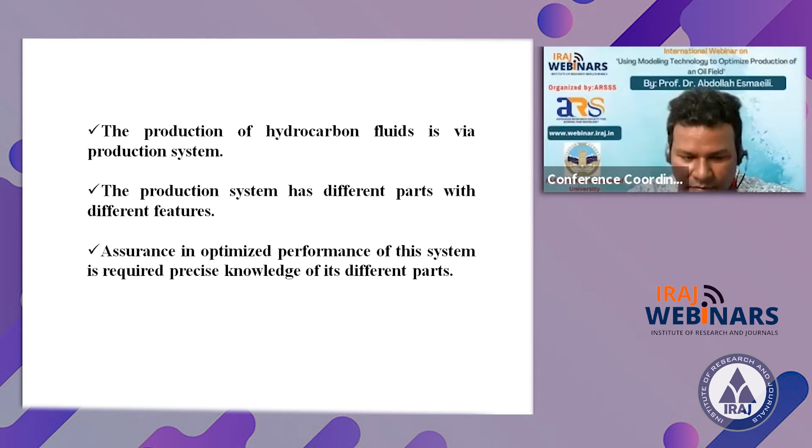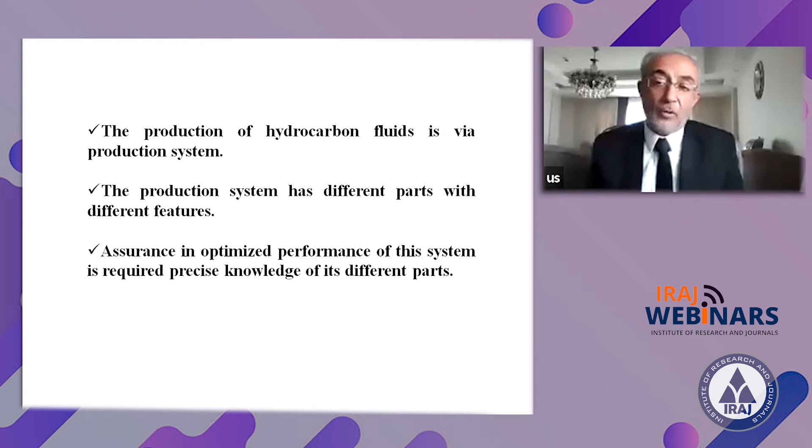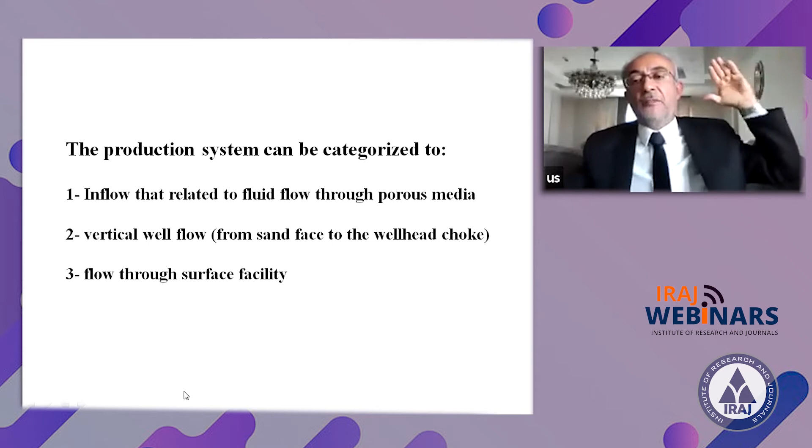So the production system can be categorized according to our division in the petroleum industry. Inflow relates to fluid flow through the porous media to the media. So we can divide this into three parts: the fluid will start from the reservoir to the wellbore, then from the wellbore to the wellhead, then from the wellhead to the production unit or to the refinery, or to any other units. So we will have three parts.

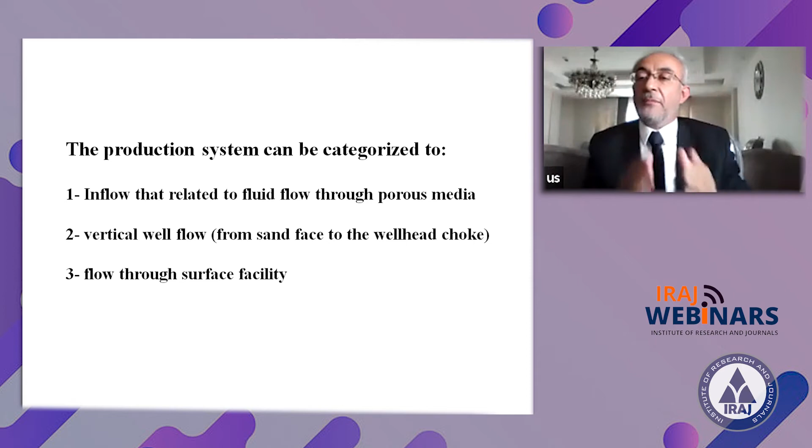First of all, in our system, from the reservoir to the wellbore, then from the wellbore to the wellhead, then from the wellhead to the production. So if we want to optimize this system, we must be able to optimize the total of this system, from reservoir to the wellbore, from wellbore to the wellhead, from wellhead to the production unit.

So by using available methods - but how can we? Here at the first line you can see: by using available models, any part of the production system can be modeled. Yes, but how? We are here to discuss that. Inflow information of production systems such as reservoir pressure, temperature, fluid type, and porous media characteristics, and vertical well flow information like well geometry and pressure control devices, can be used to model the production system.

And after modeling, what will happen? After modeling, we must be able to interpret it. So not only is the modeling very important, but interpretation is more important than modeling. So after modeling a production system, any problem can be specified, then proper methods will be able to remove them to solve our problems by modeling.

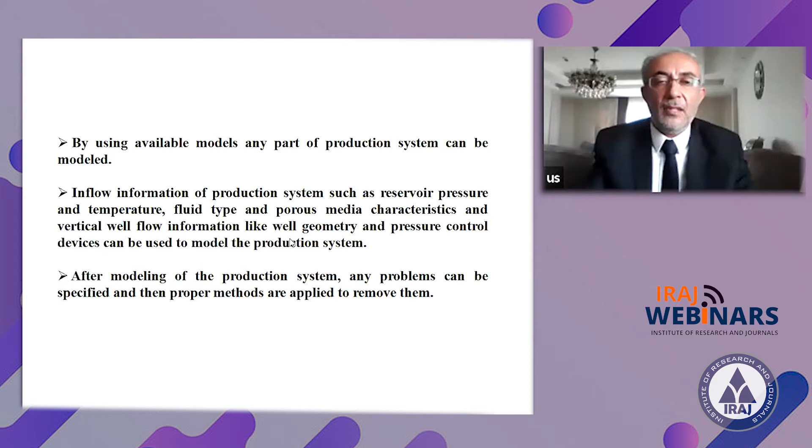Okay, so what will happen in this study? In this research, we will select two wells of an oil reservoir. As you know, in an oil reservoir we have a lot of oil and gas wells - maybe 100 wells, maybe 200, maybe 300, sometimes more than 300. In simulations, it's not possible for us to simulate or model all of these wells. So we will select two of these wells and compare them together and with the actual case.

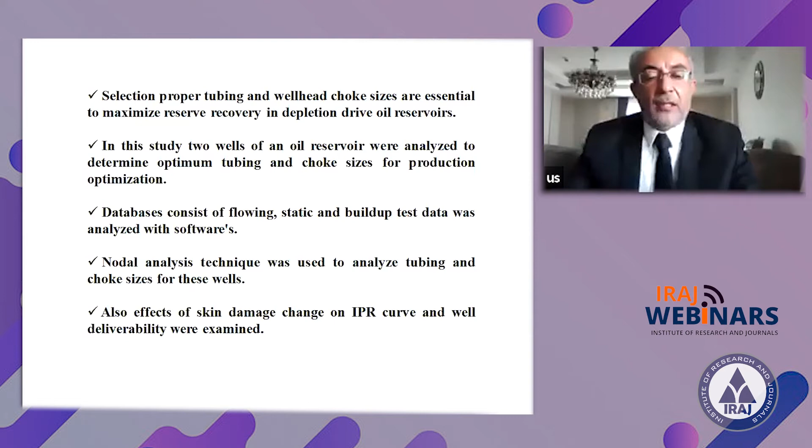So, nodal analysis techniques - what techniques will we use? We will use nodal analysis techniques to analyze tubing and choke size for these wells.

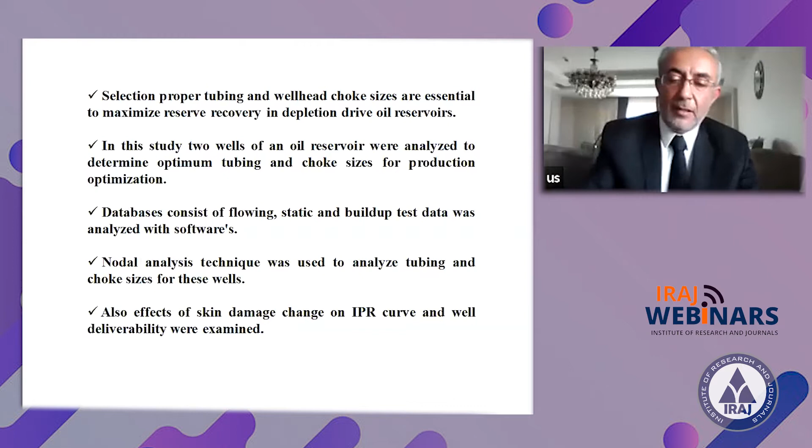What will be the objective of well optimization methods? Our objective in optimization, first of all, is to find the optimum rate. Then we must be able to optimize our other facilities.

According to this, you can see well inflow performance relationship (IPR) and tubing performance relationship (TPR) are the basic requirements for analysis. We will use the totality of this data in our modeling.

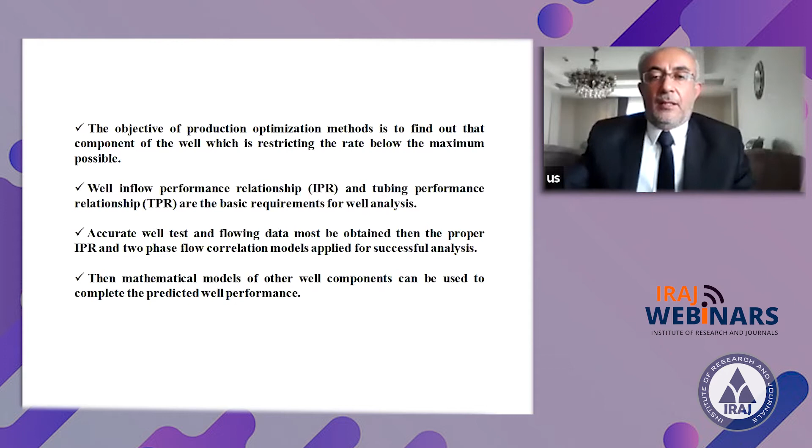Analyzing well performance - how can it be done? Analyzing well performance is an important step to optimize production by improving production techniques.

How can this analysis be done? This analysis can be performed by well test and examination of the field data.

Data gathering was the main problem of this study - not only for this study, but for all our studies. Data gathering is very important at first because, as you know, our studies will be based on our data. If our data has errors, the modeling will have errors. So we must be careful with the data at the first step.

This analysis can of course be done by software. But which software? As you know, we have several software packages for modeling.

We have several software packages in the oil and gas industry - some for underground modeling and some for surface facilities, to model the devices of our production unit at the surface. So generally, our modeling software is divided into two groups: one to model activities underground, and one to model activities at the surface, at the ground.

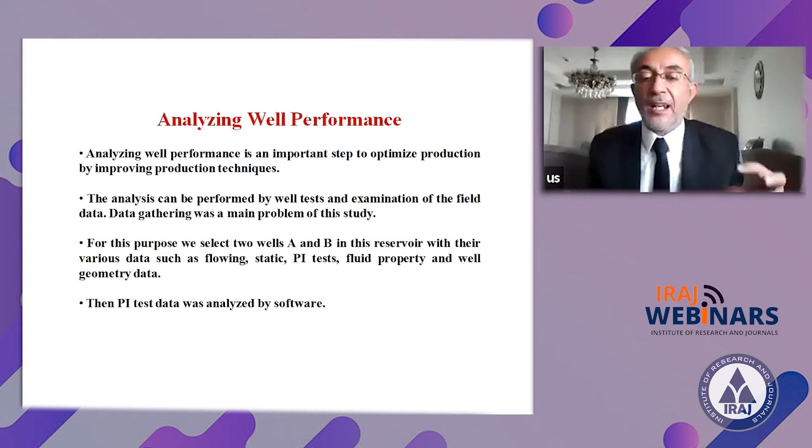PI test, as you know, stands for productivity index test for the well. It will be used in a short time, therefore it cannot detect the correct skin and permeability precisely - it only shows an approximate amount of skin and permeability, as you know.

After that, using software, the tubing size and choke size for these wells were examined. Also the effect on inflow performance in production, skin factor, and reservoir pressure will be analyzed. We will have tables, table 1 and table 2, showing the well reservoir fluid properties, and production data collected for well A and well B.

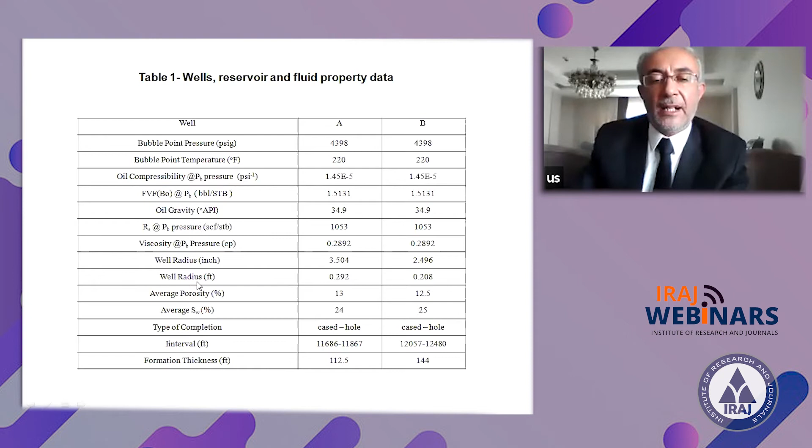Table 1 shows data for well A and well B: bubble point pressure, bubble point temperature, oil gravity, and oil formation thickness, for example. Table 2 shows production conditions of well A and B, for example production rate, reservoir pressure, GOR, water cut, and other properties.

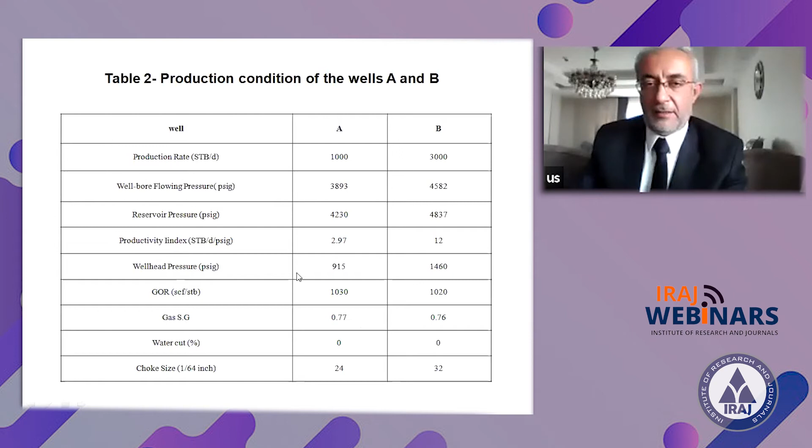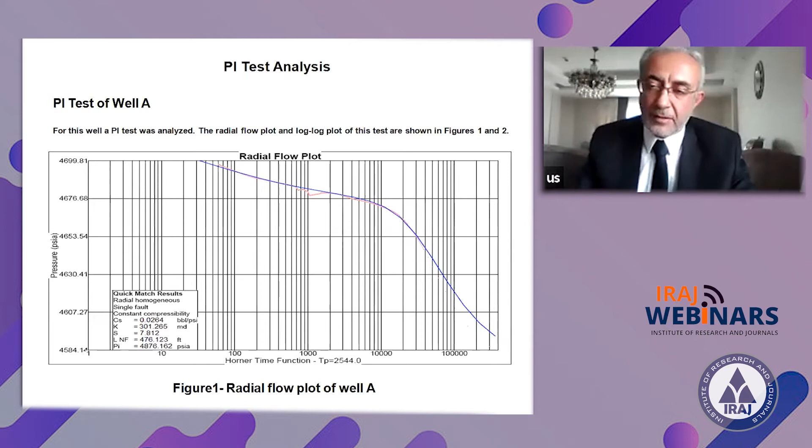In the PIT data, you can see what happens in PIT analysis. This PIT analysis is for well A. It can be done using PanSystem software, or by Eclipse 200. So we have several software options for this analysis.

This is the log-log plot. This is the radial flow plot, and here is the log plot. Again, this is for well B, and this is the log plot for well B.

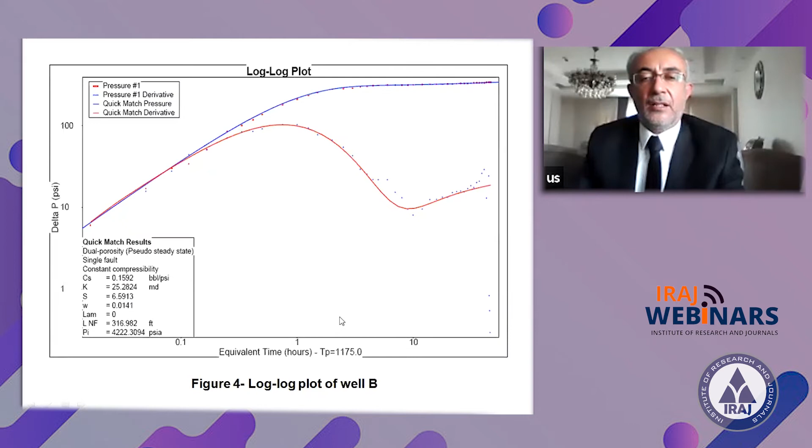The results of the PIT test and analysis by software, including skin factor and reservoir permeability, are summarized here - for well A and well B, the skin factor and permeability.

How can we get this data? By analysis, by well test, and by PIT. As you know, in the petroleum industry we can get permeability and skin factor from logs, and at the same time we can get this data from the laboratory and from well testing. So we have two separate methods: well logging, or well testing.

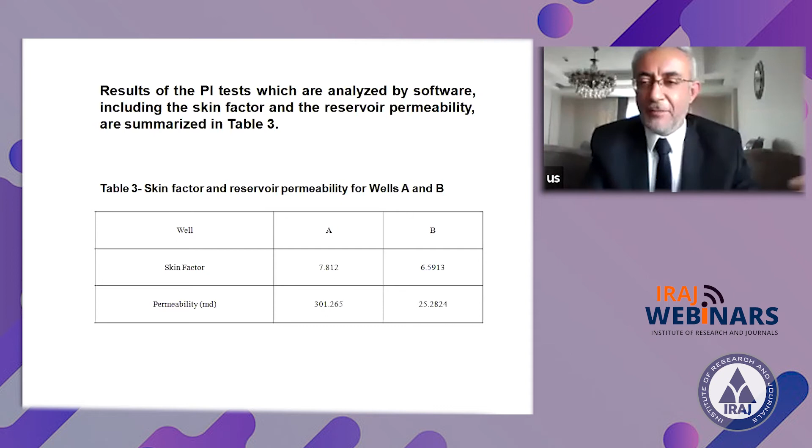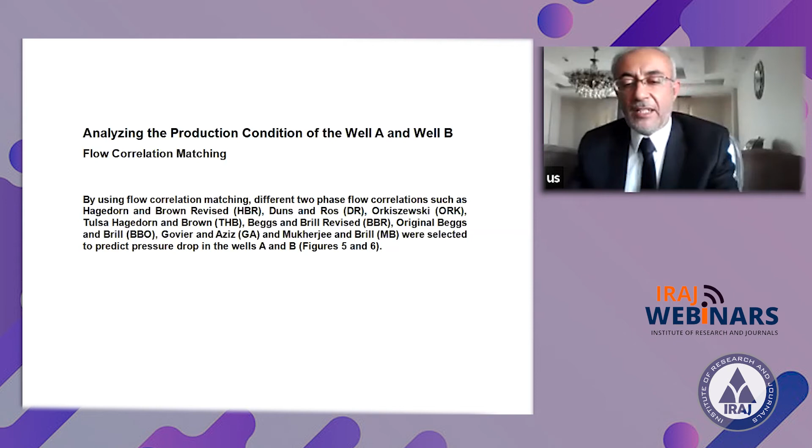Analyzing the production condition of well A and B fluid - now we will have flow correlation matching. Here is correlation matching for well A, and here is flow correlation matching for well B. How? By software.

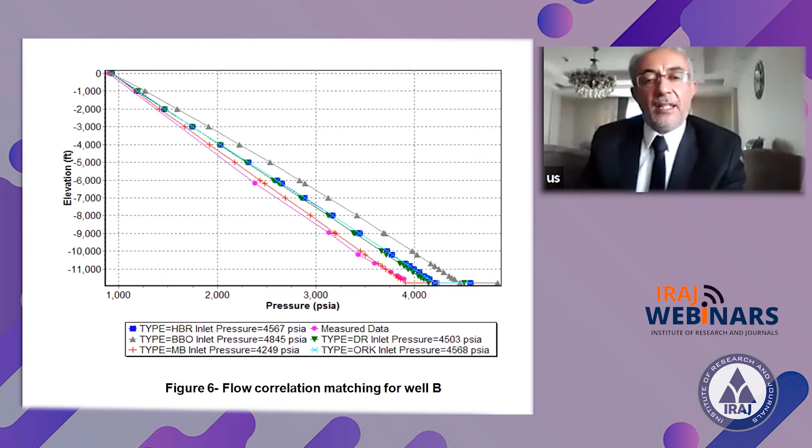Tubing size analysis - as you know, tubing in an oil and gas well is very important to optimize production. Not only tubing but also casing is very important in design. But in further discussion, we analyze the tubing size here, as you can see.

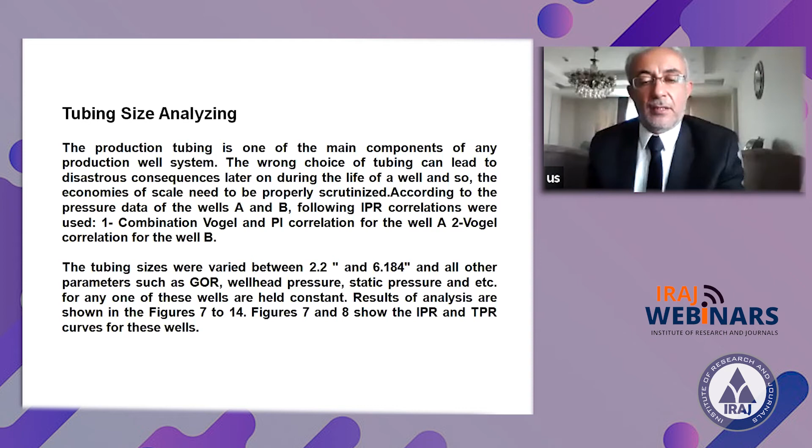This is the IPR and TPR curve for well A, according to the software. This is the IPR and TPR curve for well B.

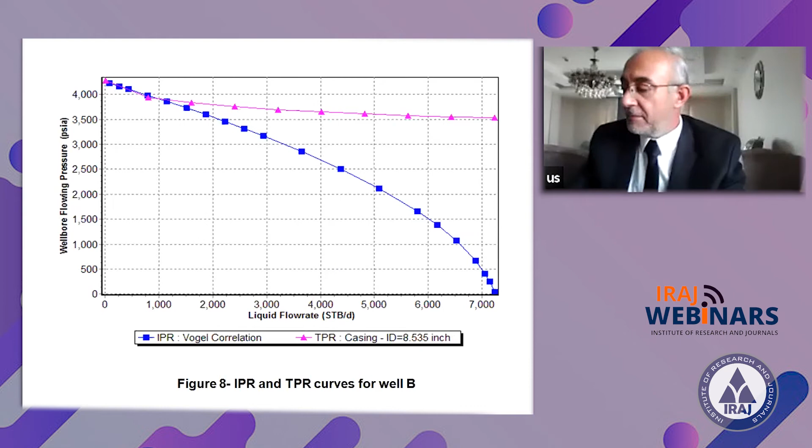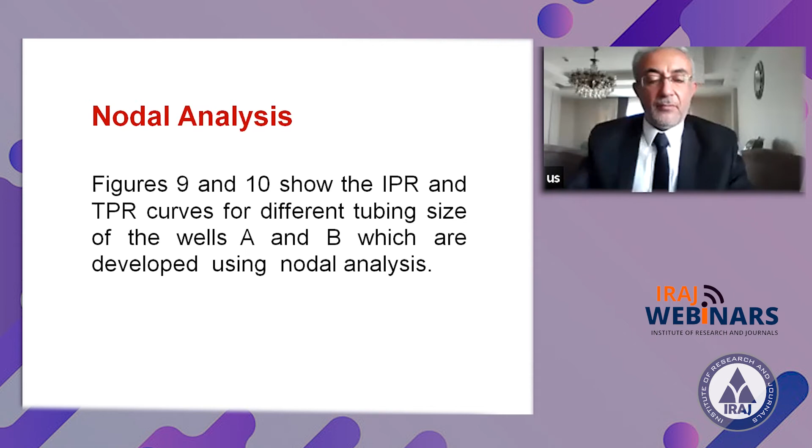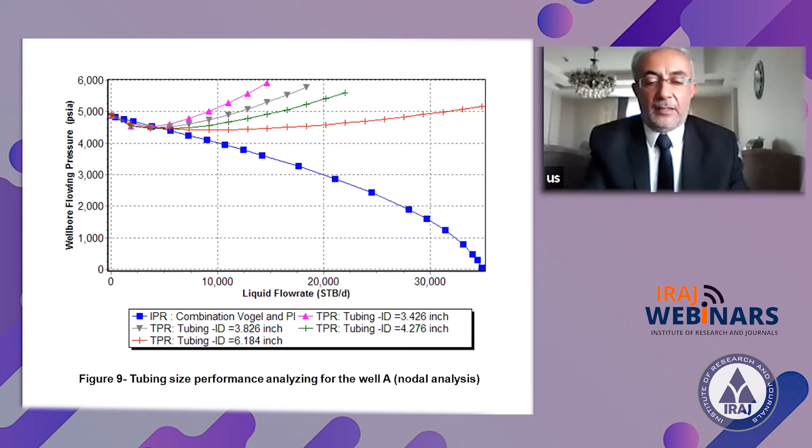As I told you at the beginning, we will use nodal analysis. Figure 9 and Figure 10 show the IPR and TPR curves for different tubing sizing of well A and well B, developed using nodal analysis. In Figure 9, you can see tubing size performance analysis for well A by nodal analysis. In Figure 10, this is for well B, again by nodal analysis. As you can see, this is IPR for Vogel correlation.

TPR is the tubing performance relationship. This is for tubing internal diameter test, for various internal diameters. You can see the relationship between the liquid flow rate and the well flowing pressure for the various sizes of tubing. So we are going to determine which one is better, which one is the best case. How? You can see these figures by using the software.

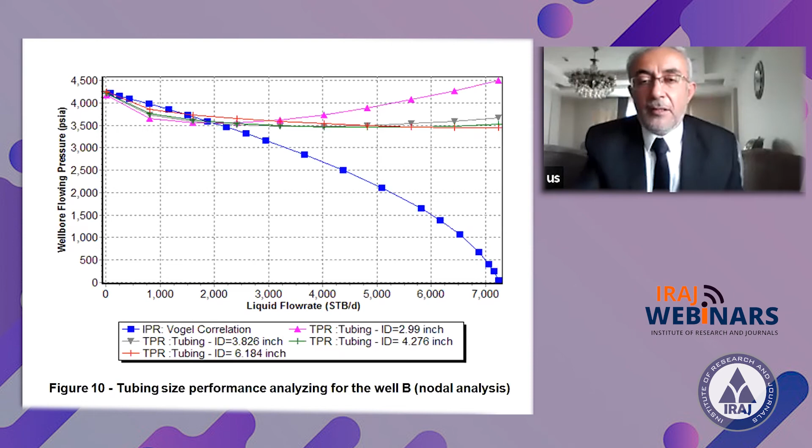Okay, reservoir pressure effects. What will happen in reservoir pressure effects? Figure 15 and 16 will show this. For this analysis, reservoir pressure depletion is very important, so pressure drop is very important in a reservoir. So how can we increase the pressure, how can we stabilize the pressure?

At the first step, we are thinking about how we can stabilize the pressure. At the second step, we must think about how we can not only stabilize the pressure, but also how we can increase the pressure.

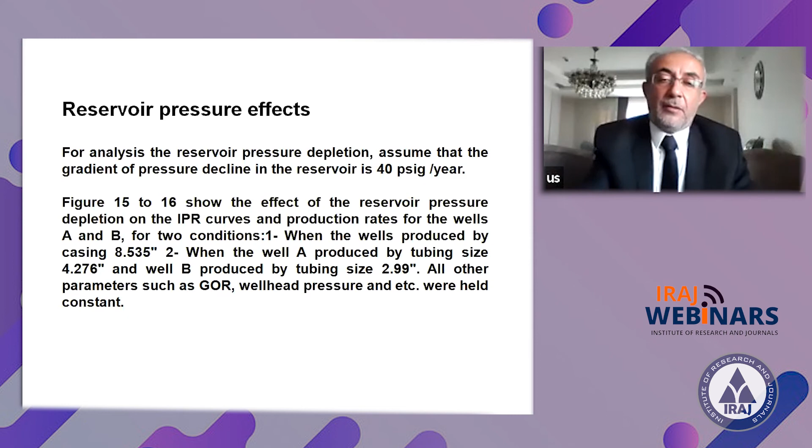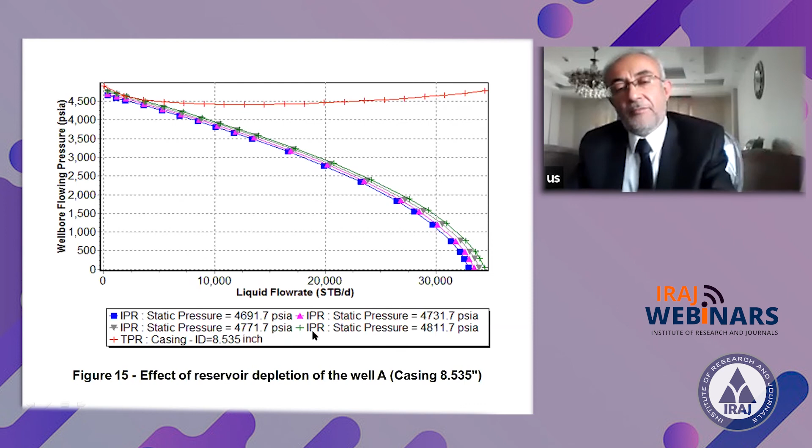For analyzing the skin effect on IPR curves, the pseudo-steady state equation for inflow performance relationship (IPR) was used. This is summarized in Figure 17 and 18, showing the effects of skin factor on IPR curves for well A and well B. So we use the pseudo-steady state equation.

But why pseudo-steady state? Maybe you will ask me in the question and answer section. As you know, in chemical engineering and petroleum engineering we use two types of equations: steady state, or ideal state, and unsteady state, and pseudo-steady state. We will discuss in the question and answer section why we used the pseudo-steady state equation.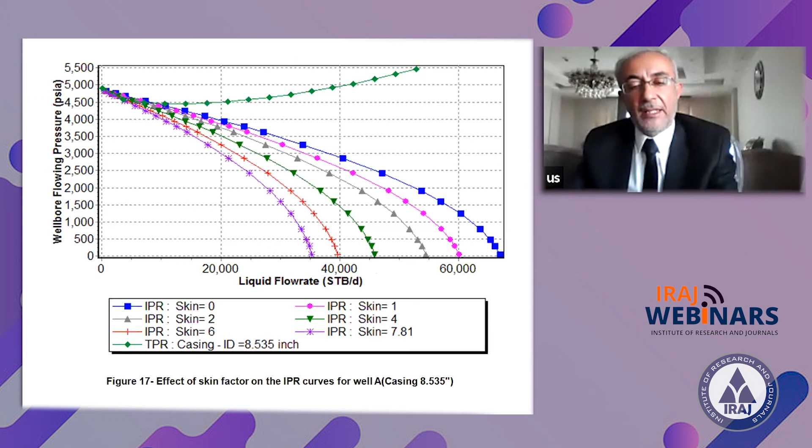So, effect of skin factor on IPR curve for well A: you can see here for well A, and for well B in the IPR curve. What will be happening for the skin factor? Skin factor 0, skin factor 2, skin factor 5, 1, 3, and 6.

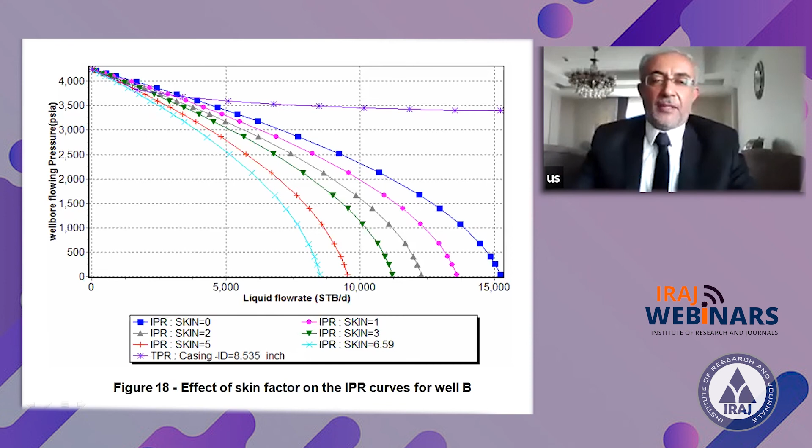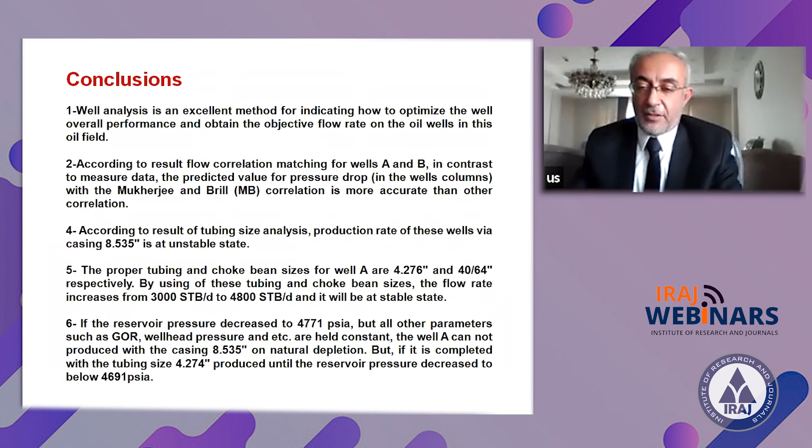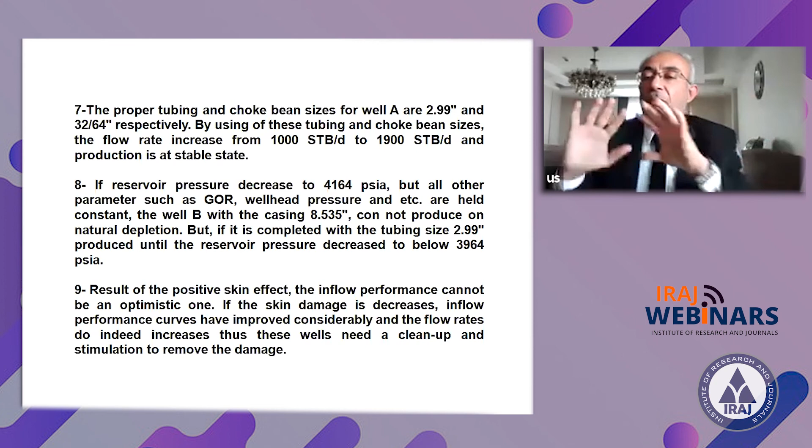Conclusion: first of all, well analysis is an excellent method for indicating how to optimize the well's overall performance. But how can we do it? By several software. As I told you, we have two types of software: one type for modeling our activities underground, and one type of software used to model our activity at the surface.

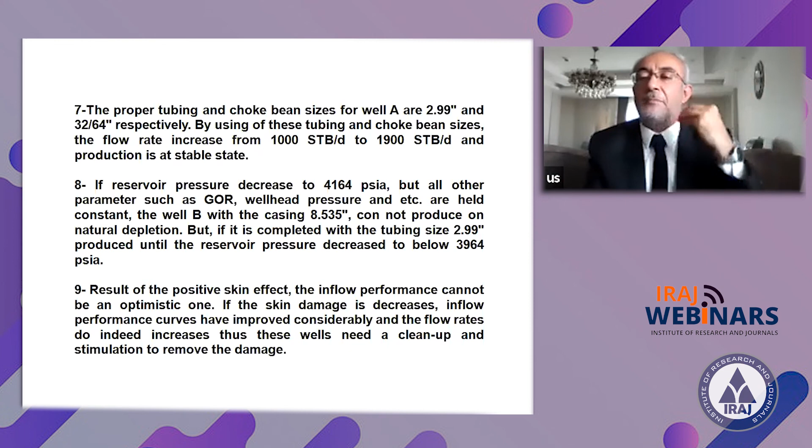The second point is to use the correct data, because the input data is very important to get a good result and optimize the production. Generally, three parameters must be optimized in operation: flow rate, pressure, and temperature. These three main parameters must be controlled and monitored at any time during operation in the oil and gas industry. Of course, there are other parameters, but these three must be optimized, controlled, and monitored at all times.